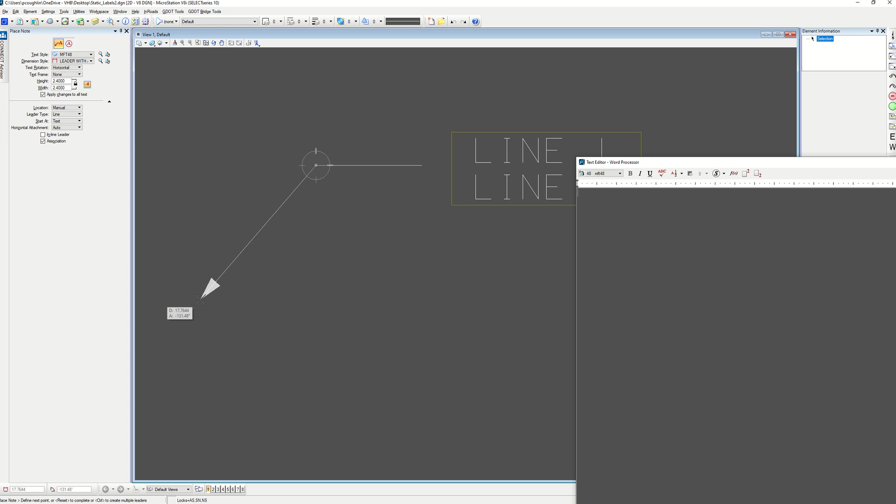Second thing is to place a note, and then you've got the actual note option, not the callout, and select association. If association isn't available, you'll need to run this key-in, which is lock association on. So once I do that, we're just going to draw an arrow out here in space using our leader with arrow dimension style. There we go. And I set location to manual. That lets me give it this elbow here.

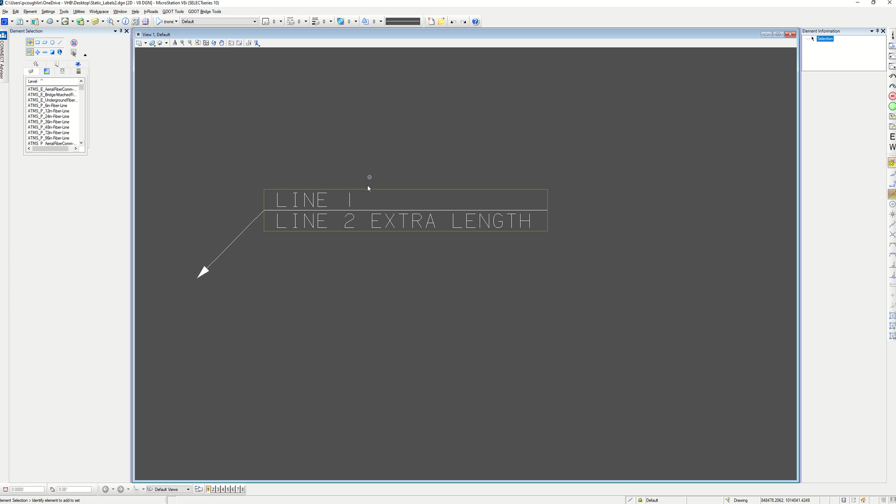And then all we need to do is snap this to the midpoint. So midpoint, midpoint, and we're good to go. So if I had extra length on this second line, because our dimension here is snapped to the midpoint of these 2 vertical lines, it's going to stretch accordingly. And you should also be able to mirror this. So mirror it, make a copy, don't mirror text.

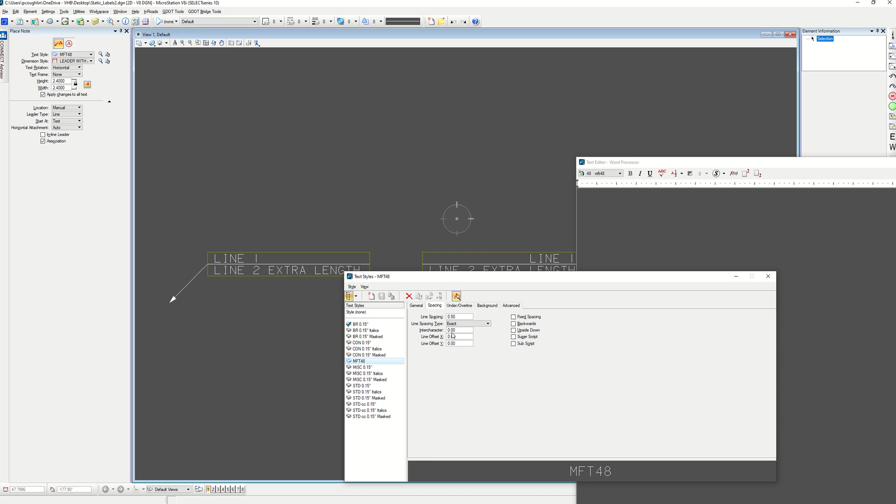And the only thing here is that it is right justified, which maybe isn't what we want. So it's possible that there's a way to force this to be left justified. Let me look at my text style really quick. Yeah, so I think when you mirror it, it is going to mirror your justification. So if you didn't want to do that, you would go in here and just change these around.

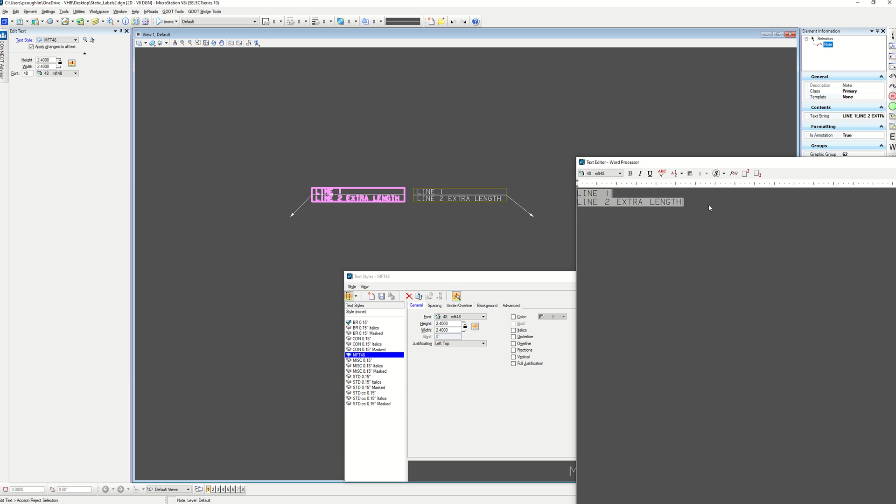Takes a little bit of work, but it's not too bad. And then again, it'll stretch and shrink according to your longest line. So it looks sort of like the OpenRoads notes or the OpenRoads civil labeler notes that have that bottom line, one divider line option. There we go.

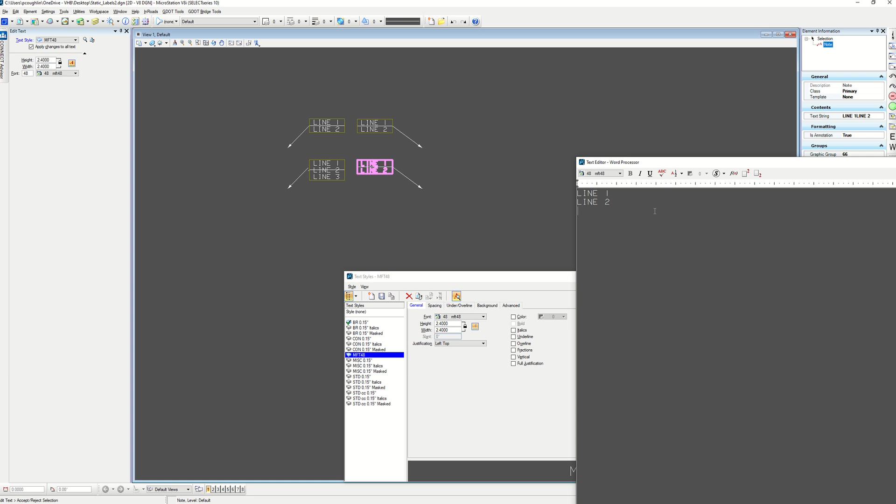And you can extend these to be more than two lines. The only thing you'll have to adjust is the attachment point for your leader. Oops, not sure what happened there. Can't type today. Okay, so now we're snapping to the midpoint. That's not what we want to do. We actually want to snap to the upper third. So in that case, you'll change your key point snap divisor to 3. It's already set there. Key point snap active and snap,

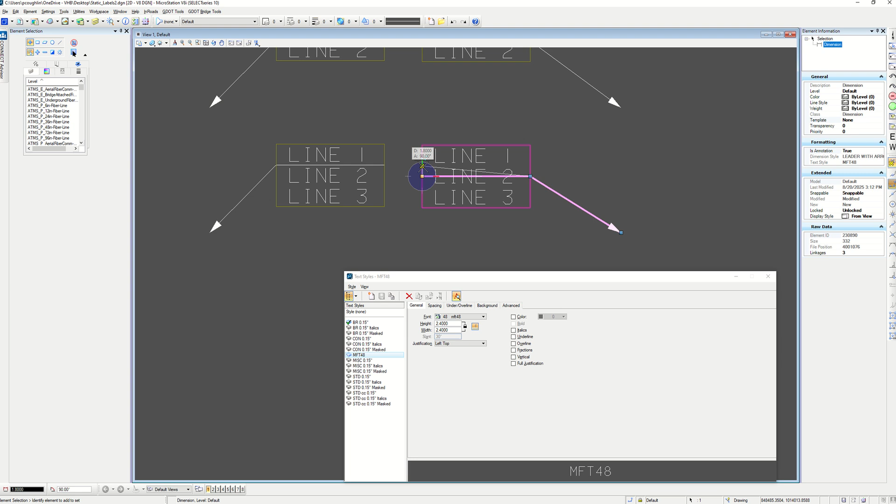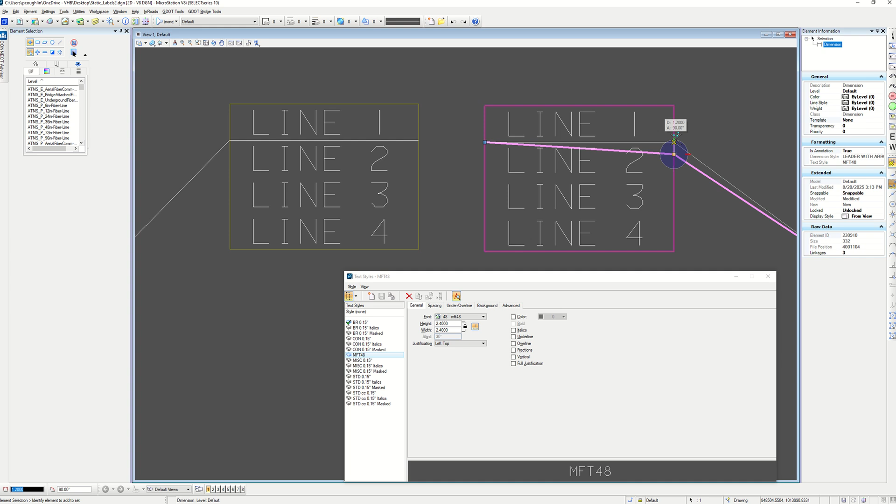snap. And we could do the same thing for four lines. Okay, change the snap divisor to 4. Point it here, point it here. Same thing. And then of course you can make cells out of all of these. So we'll just make cells out of a couple of them.

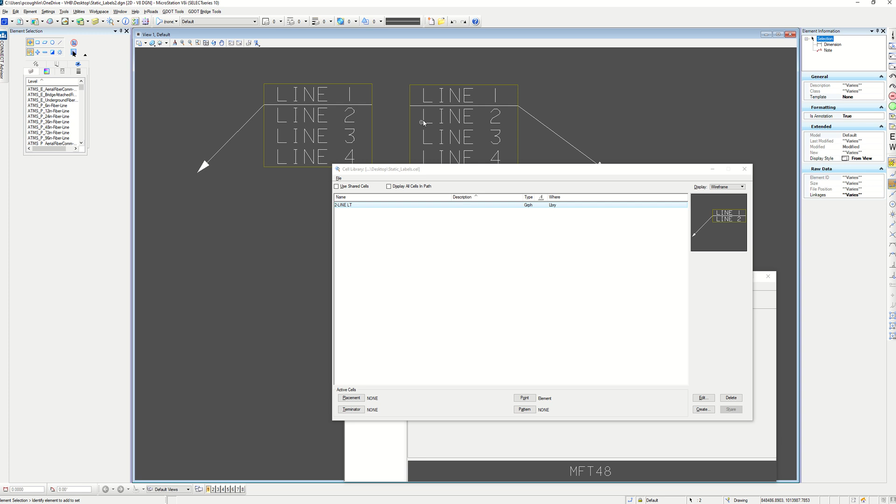Set the origin. Open my cells dialog. I'm going to delete these that I already created, but these are the same. And we will create, and I'll just say 2 line left. And let's do it again for this one down here. And we would call this one

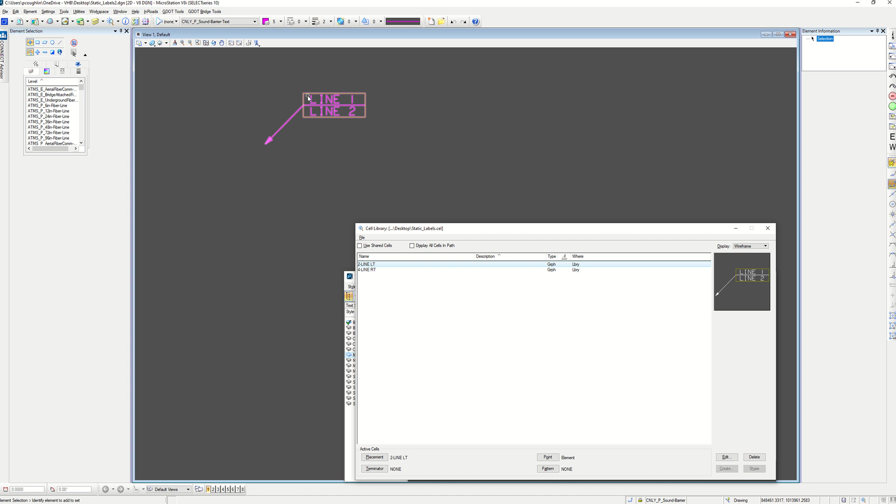4 line right. So now if I change my active level settings to anything else, and I place that cell that I just created, the text and the leader come in on your active level settings. So all you need to do to get this to work is to drop it after you place it, drop complex only, and you're good to go. And the same thing would apply for this other one. There you go, and you will just have to drop complex here.

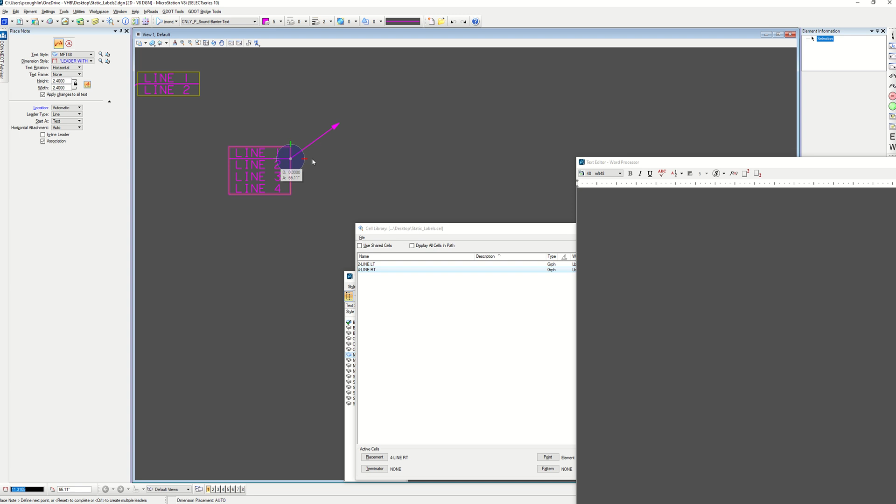If you want to, you can add an additional leader to these. So I would just go back into your place note command, do leader with arrow, location automatic, I think is what we want, and then just make sure this piece gets associated. And you're good to go. And you can also run the change dimension command and change it to a different dimension style and change it back if you need to. You can even change just one if you have some reason. So if you have a bunch of dimension styles, one with a filled arrow or an open arrow or a closed dot or anything like that, it should work.

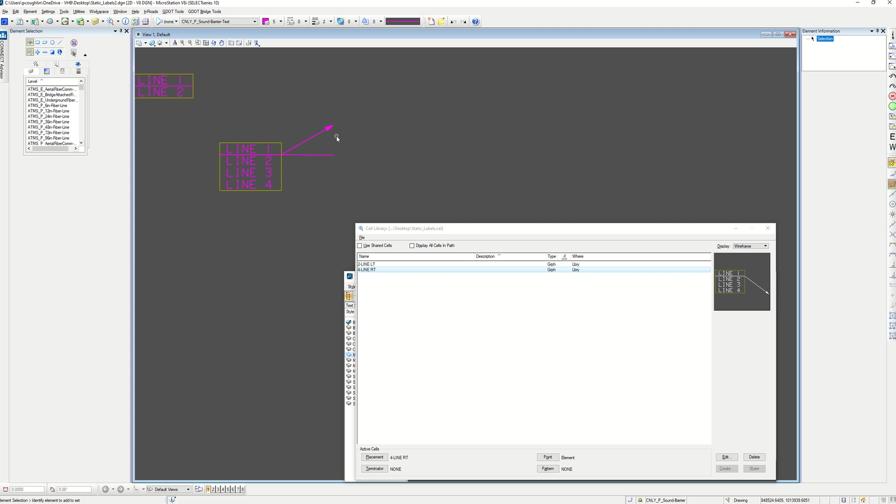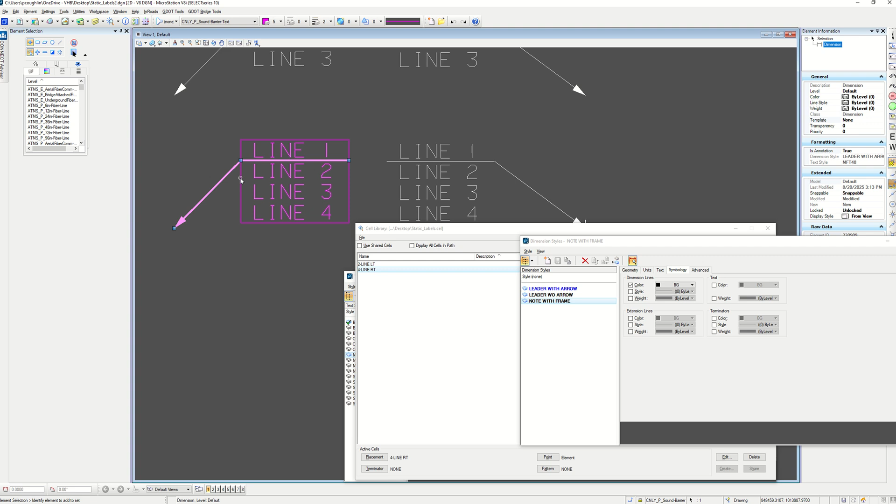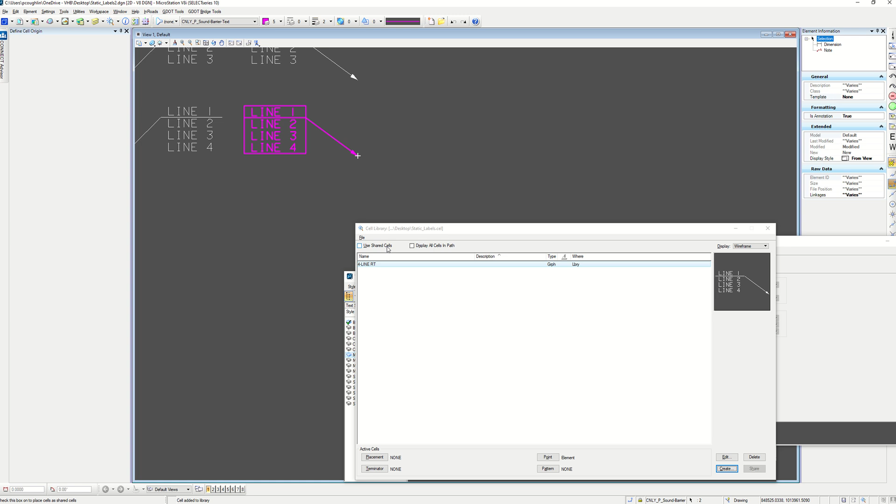So the other option when you're doing this in your dimension style is to adjust this note with frame to print color BG. There we go. So it doesn't affect the ones that we just placed because those have the old dimension style, but there's still a frame here. It's a little harder to snap to, so it depends on how comfortable your users are. But if I was to delete these and just create this one again, because I've already got it selected, why isn't it giving me the option to create? There we go. There we go.

And you can still adjust this. So if you only needed three lines or you needed five lines, you just need to change where your snap is. So snap divisor needs to be 3. And we snap here and here. You just have to have an idea about where this border frame is.

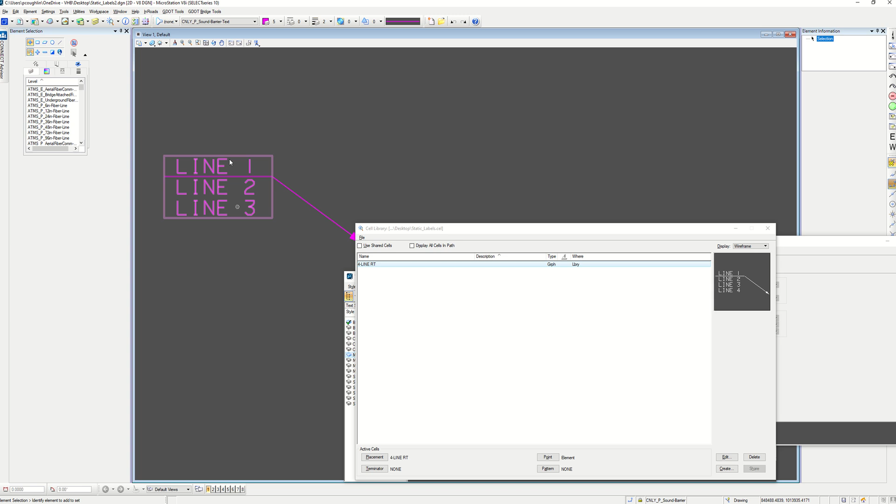But yeah, I hope this helps someone. I've been working on it for quite some time, so I am reasonably happy with how it's working. And again, because this was done with just regular MicroStation tools and using the built-in dimension associations, this should hold for really any instances of OpenRoads. Whereas there are ways to accomplish the same thing with the civil labeler by breaking it in a very specific way, but that doesn't propagate back down to MicroStation. So yeah, I hope this helps. That's all I got for today.